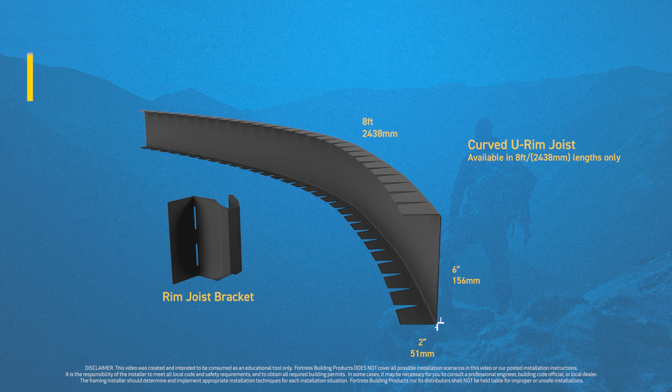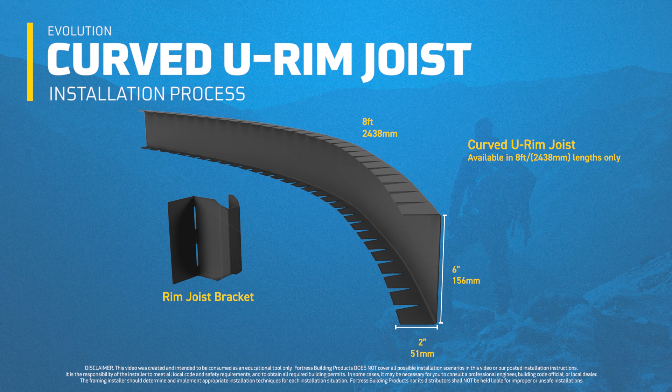In this simulation video, we'll be taking a look at the process to install a curved U-rim joist onto a drop beam deck. This will include showing how to use the rim joist bracket, which is a unique piece of hardware that is required when mounting this particular type of rim joist. Before we get started, here's a list of the recommended tools and safety equipment you'll want to have on hand when working with our Evolution steel framing product.

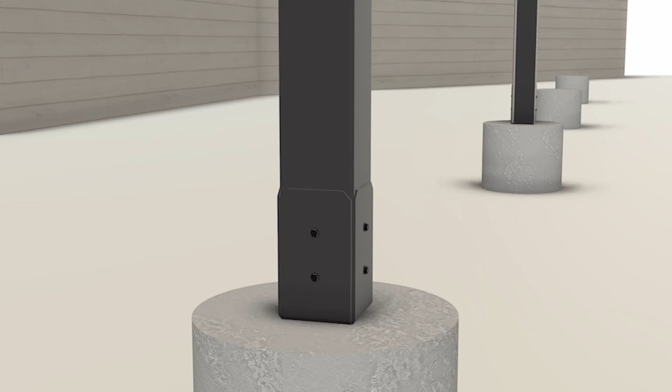Know that all posts must be temporarily braced until fully stabilized and permanently connected with framing or other structural members. For deck frames, this means that all beams, joists, hangers, and any blocking that shores up the structure should be in place before the bracing can be removed. In short, the deck frame should be fully assembled and secured first before bracing is removed from the assembly.

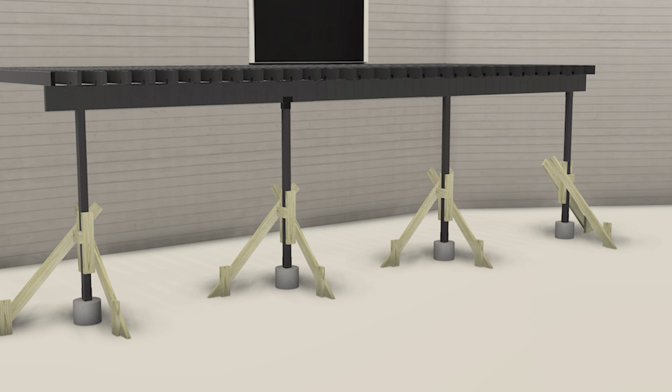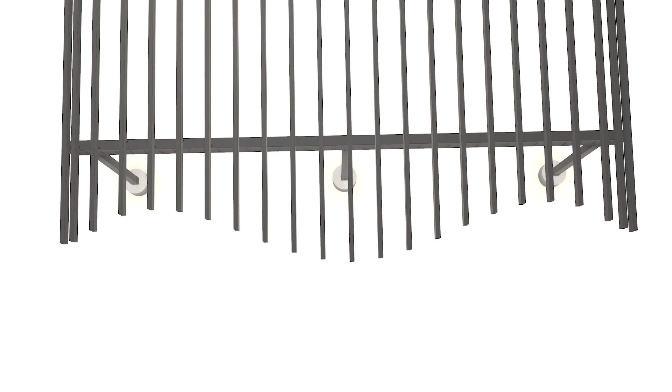The curved U-rim joist is to be used in applications to cap the end of the span joist to create a curved edge. This adds a different aesthetic to a traditional deck and can allow for a more creative and unique-looking deck build. Before this type of rim joist can be added, all the span joists will have to be cut to length. So, joist lengths will need to follow the planned specification or drawing that will support the contour of the outer curve. One of the advantages of this particular build is that the joist can be cut flat. There's no need to make complex miter cuts on the ends of the joists.

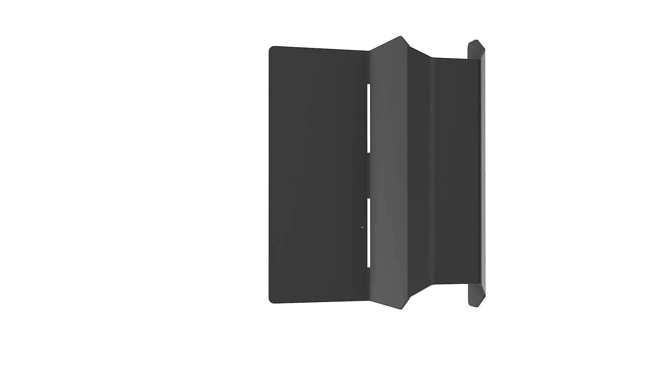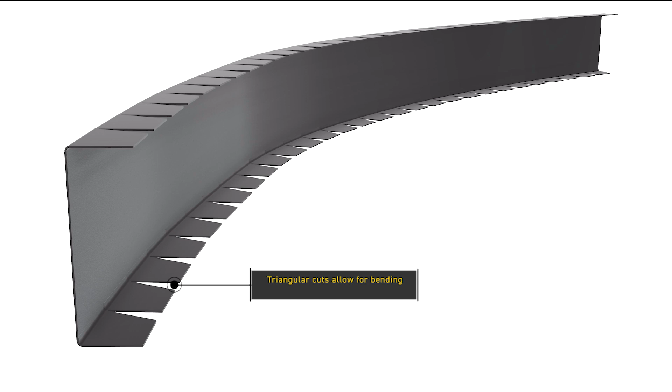To deal with the angled aspect of creating a curve at the edge of the deck, Fortress Building Products created two innovations: the rim joist bracket, which has a bendable tab, and the curved U-rim joist that can also be bent due to the slits in the top and bottom. These two items, when combined, will adjust to compensate for the angle.

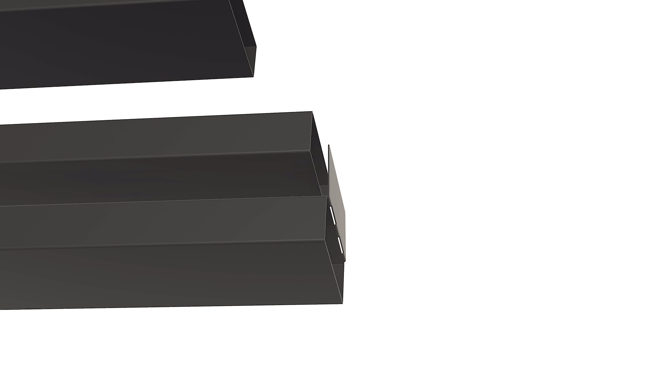Once all the cut-to-length joists have been added to the deck, add a rim joist bracket into the first joist on the end. Then secure the bracket in place with a screw on each side of the joist. Know that one side of the bracket that was inserted was shorter than the other, so be sure both screws are positioned so that they will go through the joist and grab the bracket on each side.

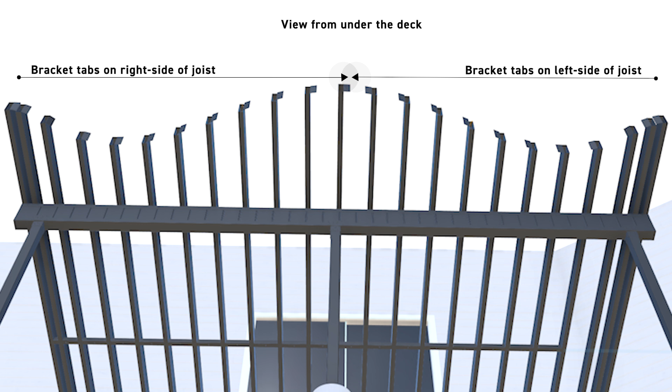Next, take the tab of the bracket and bend it so that it's angled towards the backside edge of the next joist. Then repeat this same process of inserting, attaching, and bending brackets on the ends of all the span joists. Note that the rim joist bracket can be alternated or flipped over as needed to support left or right-facing applications. This comes in handy to support the other half of the deck's curve, shown in this example.

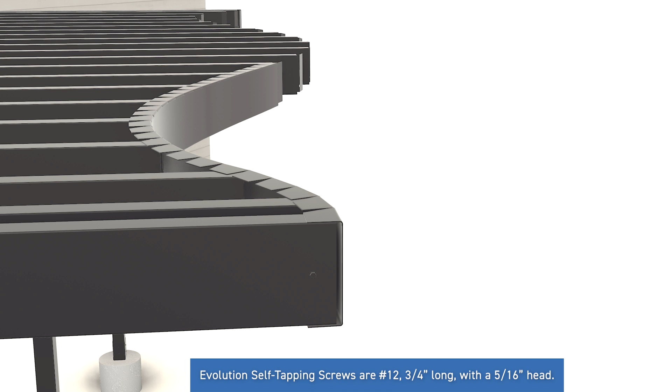Once all the brackets have been attached and angled, the curved U-rim joist can be added. The curved U-rim joist will start out in a more linear form. However, it can be bent as it's installed to conform to the shape created by the joists and rim joist brackets. To begin installation of the curved U-rim joist onto the deck, slide it onto the end joist, ensuring that it's flush to the outside of the deck. Then attach it to the joist on the top and bottom with Evolution self-tapping screws.

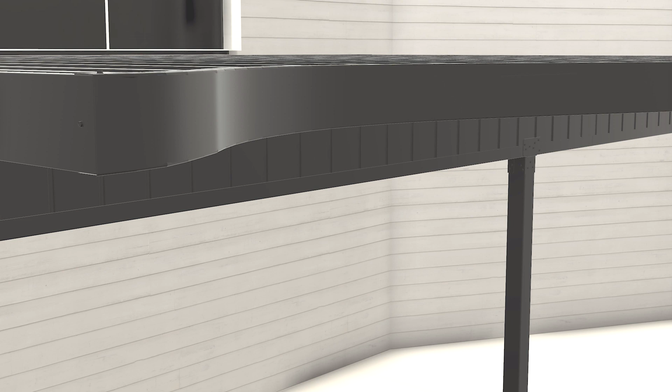Next, push the rim joist up against the angled tab of the rim joist bracket and add a minimum of 2 screws to the outside of the curved U-rim joist. These will need to penetrate the tab section of the bracket. Continue the process of pushing and holding the curved U-rim in place against the next bracket in line and secure it in place from the outside. Repeat the process of pushing or bending the curved rim joist as needed to create the desired contour while securing it to each of the brackets.

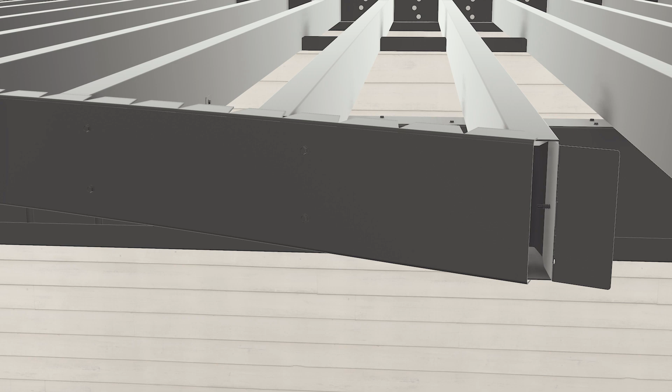When you reach the end of a section of curved U-rim joist, secure it to the top and bottom of the last joist with Evolution self-tapping screws. At the same time, make sure enough space or blocking is available to attach the next section of curved U-rim joist. This process can be repeated along the front of the deck until the installation of all sections of the curved U-rim joist have been completed.